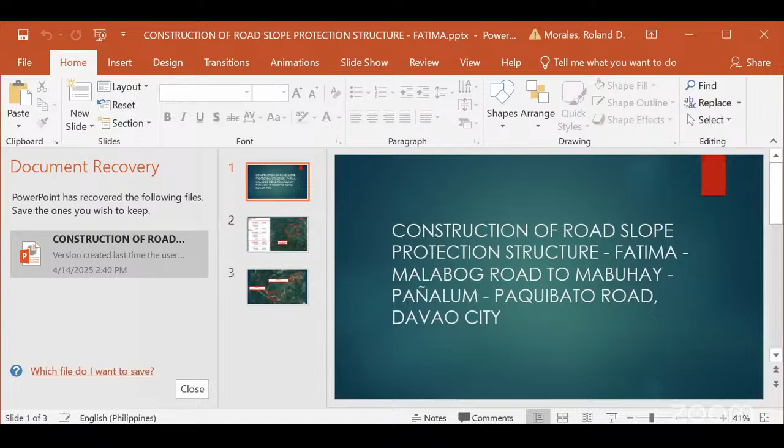Good afternoon, everyone present here, Mr. Chair. We will now proceed with our first project for this pre-bid conference. The first project has contract ID 25LO0020, with contract name construction of road slope protection structure, Fatima Malabog Road to Mabuhay Pañalum Paquibato Road, Davao City. The scope of works includes construction of reinforced concrete retaining wall, construction of 0.3 meter diameter micro piles, construction of steel sheet piles, slope protection, construction of concrete road, concrete paving of shoulders, construction of lined canal and other minor drainage structures, installation of metal guardrails, installation of road signs, application of reflectorized thermoplastic pavement markings, removal and furnishing of trees, and installation of basal reinforcement. The approved budget for the contract is 43,425,000 pesos with a contract duration of 240 calendar days.

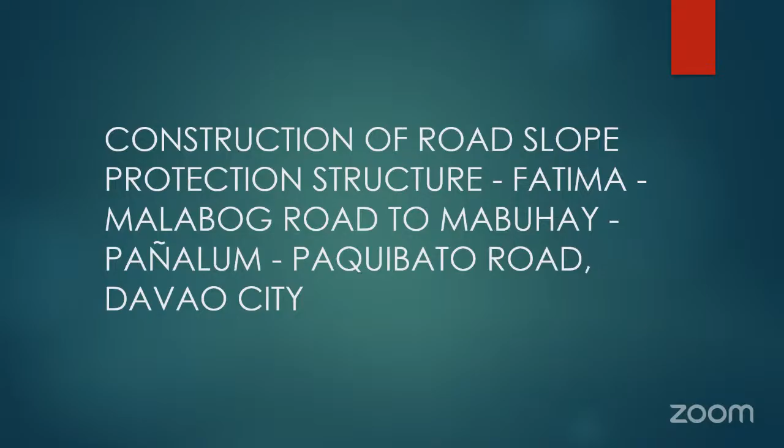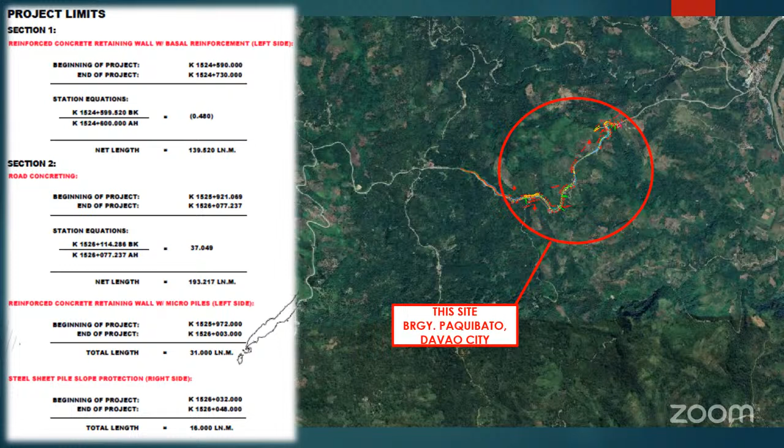As shown in the screen is the general area or vicinity of our project, located in Barangay Paquibato. This project comprises two sections: Section 1 has a net length of around 139.5 linear meters, including construction of reinforced concrete retaining wall with basal reinforcement on the left side. Section 2 has a net length of 193.2 linear meters, including road concreting, reinforced concrete retaining wall with micropiles, and steel sheet pile slope protection. If we zoom in further, these are the locations of the two sections. That would be all for this project.

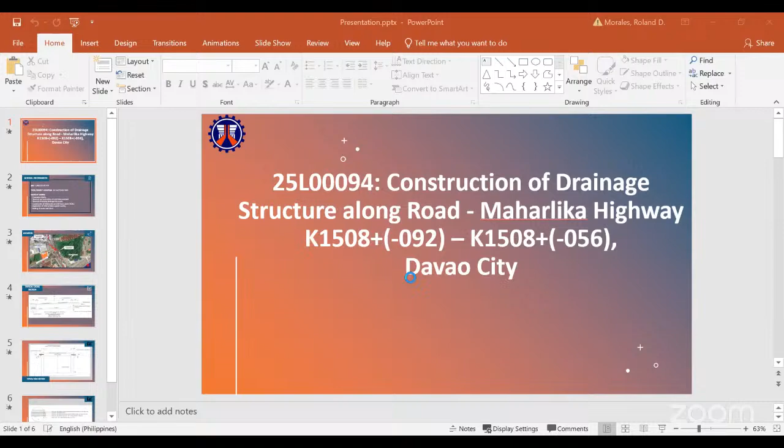Okay, so 45 calendar days. Any questions from the contractors?

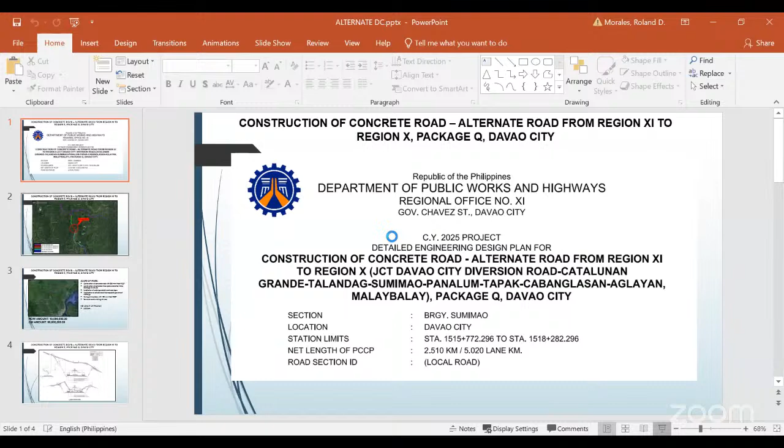Good afternoon, Mr. Chair. For contract ID 25LO0100, construction of concrete road, alternate road from Region 11 to Region 10, Junction, Davao City Diversion Road, Catalunan Grande, Talandag, Sumimao, Panalum, Tapak, Cabanglasan, Aglayan, Malaybalay, Package Q, Davao City.

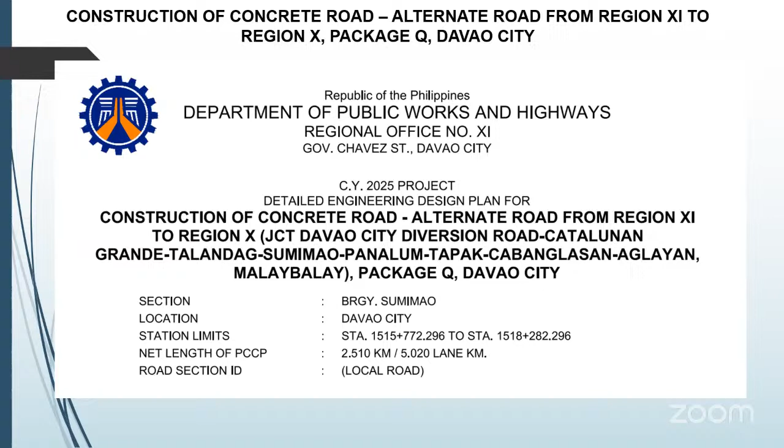The scope of works are construction of concrete road with 280mm thick PCCP, paving of shoulders with 150mm thick PCCP, construction of concrete lined canal and other minor drainage structures, installation of metal guardrails and road signs, removal and furnishing of trees, and application of reflectorized thermoplastic pavement markings.

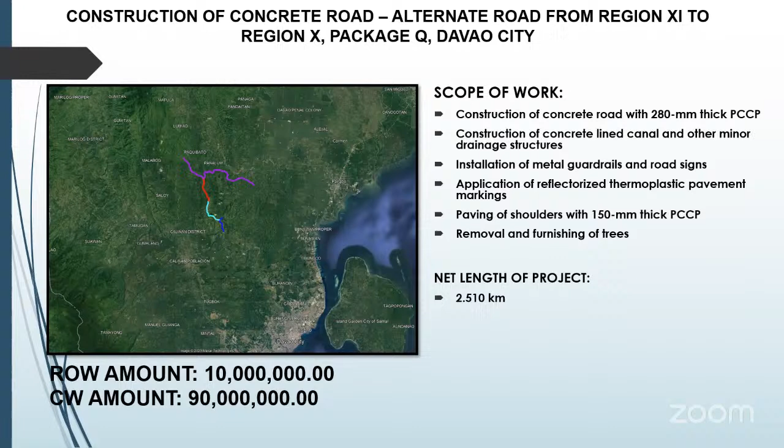The approved budget for the contract is 86,850,000. Contract duration is 240 calendar days. The total length of this project is 2.51 kilometers with an ROW allocation of 10 million. So this is the location of the project.

The color purple one is the Fatima Malabog Road. And the blue one sa baba is the Talandag. This one is the Talandag Fatima Road. So ito po yung alignment ng ating alternate road.

So itong green one is already paved under CY 2024. Then a portion of this red one sa 2025 is already opened na gravel road under CY 2024. So may portion na lang na hindi open, which included na siya ngayon sa 2025.

So for completing na po ito siya. The entire road is already open, connected. Connected na po.

No questions? Okay, so that's the pre-bid conference for the 6 civil work projects. So reminders?